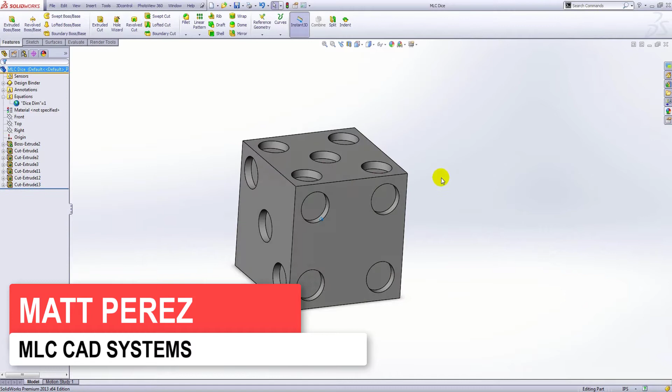Hopefully this episode we're going to take care of some fillets and we're going to bring everything into an assembly and set everything up for motion simulation.

I want to go ahead and hop into using Fillet, and make sure we select the FilletXpert tab. If you remember, our pips were 0.06 deep, so I'm going to make my fillet radius 0.12 and start selecting.

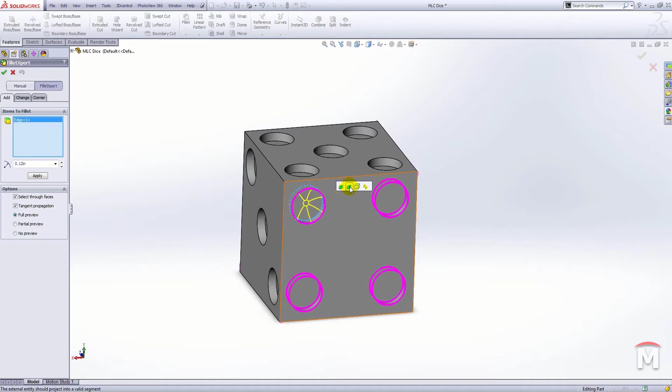We don't want to grab every single edge, but there are several options. The first is grabbing all the internal features on one face. The second is grabbing right features, the internal and external edges on that face for the extrude cut. The next is grabbing all the edges in the model, which is not what we want since we don't want to round the external edges for the pips. The last option is grabbing all concave edges.

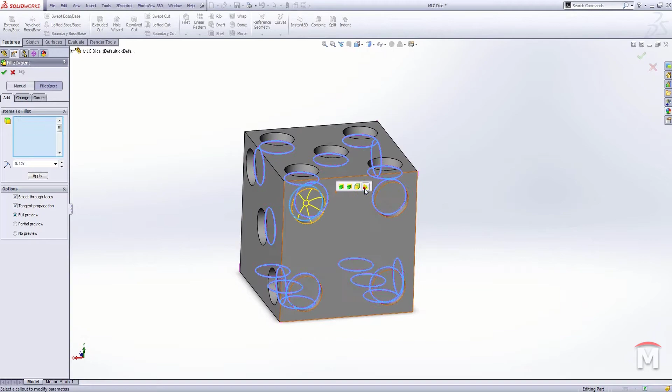This is really nice. This didn't happen to me before in 2011 or 2012 as far as I can remember. So I'm going to grab that, and it's going to apply a fillet to all those internal edges, which is absolutely perfect for me. I go ahead and hit apply, and that took very little time.

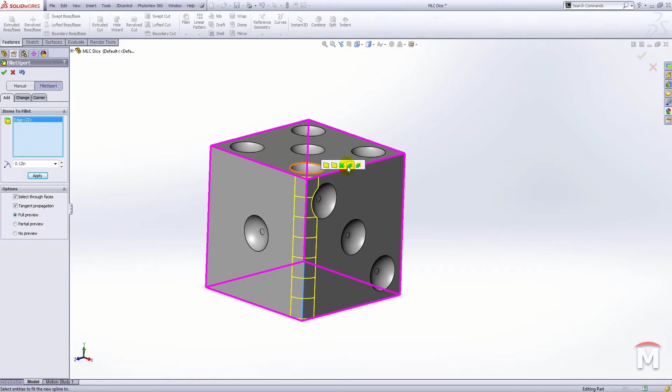Now I want to grab this edge, and I'm going to grab all the external edges. It says internal to feature 11 edges, and the feature in this case is that original boss extrude. I'm going to grab all those, but I don't want this to be the same 0.12 — I'm going to make that 0.05 and hit apply.

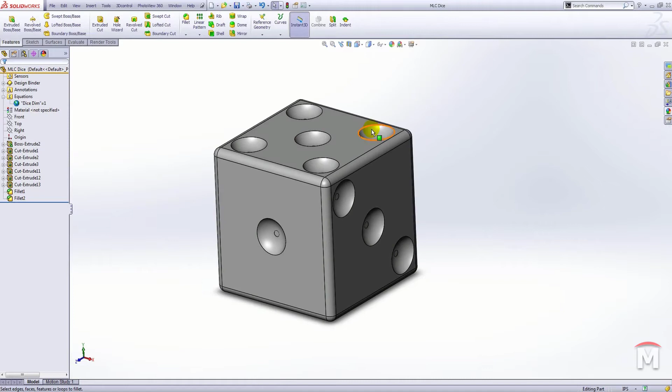Alright, I think at this point that gives us everything we need to do. So I'm going to go ahead and hit OK, save this, and before we get into the assembly and the motion, let's go ahead and apply some materials to this and do a quick render.

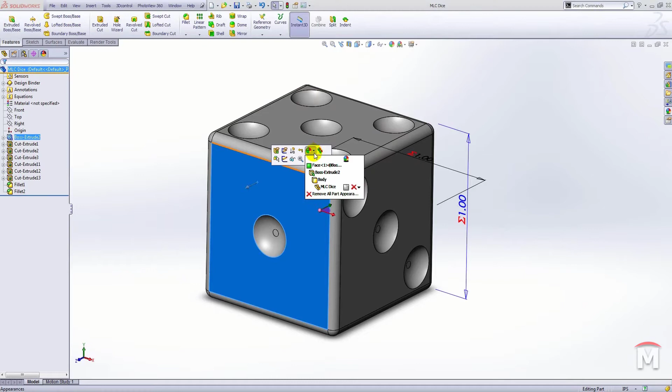2013 has seen some updates for PhotoView, and it's also seen some nice updates in that you can use some Luxology materials, which is really great. So I'm going to left click on one of these faces, use the drop down, and apply an appearance to the entire part.

In my appearances, I've downloaded some Luxology materials. Let me use the drop down box, wait for them to load — I think I've got some furry materials in here. Let's take a look at what I've downloaded: windy grass, meadow, green metallic paint. Looks like we've got a lot of grass materials. We don't have any furry materials, but that's okay.

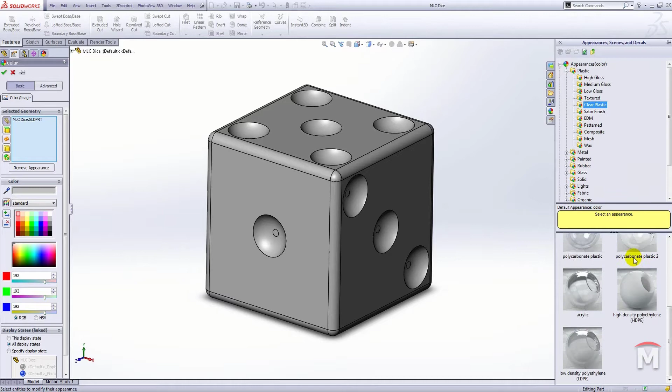We can take a look at some of the plastic materials. We're going to go into clear plastic, and SOLIDWORKS has also updated a lot of these for 2013. For me, I'm going to grab an acrylic, and go to my advanced tab to take a look at the transparency amount listed under illumination.

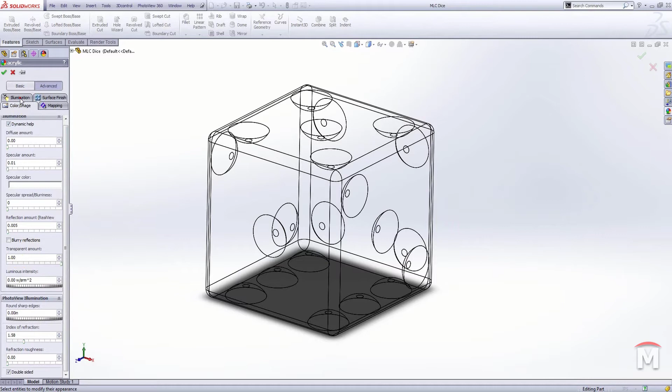Transparency amount is 100%. If I go back to color, I'm going to make this a dark red, back to illumination, and give this some transparency. Now we don't want to do 100% again, but let's do somewhere around 50%, so I'm going to do 0.5, and go ahead and hit OK.

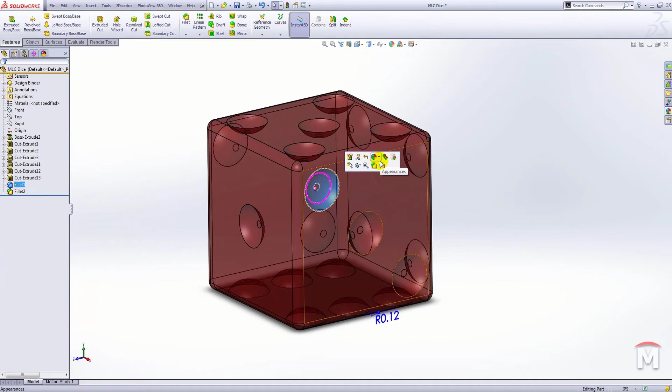Now for the pips, we want to make them white. I'm going to grab the inside of that and apply material to that face. Under plastic, I'll go to a satin finish white plastic and hit OK. Now here's where part of the great updates in SOLIDWORKS 2013 come from — we can right click on that white satin finish and say copy appearance.

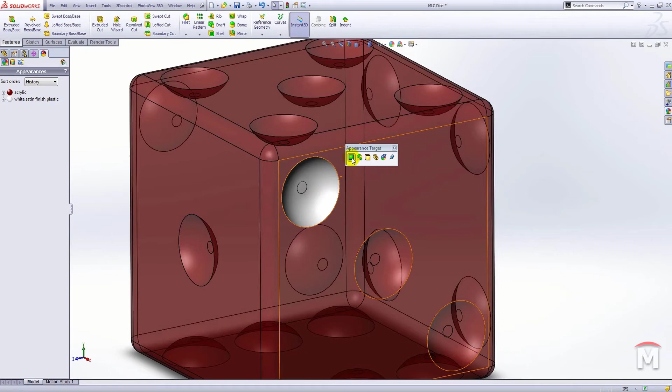Now I'm going to come into the center of this pip, and we've got some more options here. We've got copy appearance and paste appearance. I'm going to paste that, but before I do, I'm going to pin this open and make sure we're pasting it to the face, so our appearance target stays pinned open. That's another great feature here. We can simply click on this face and say paste appearance, and it happens relatively quickly.

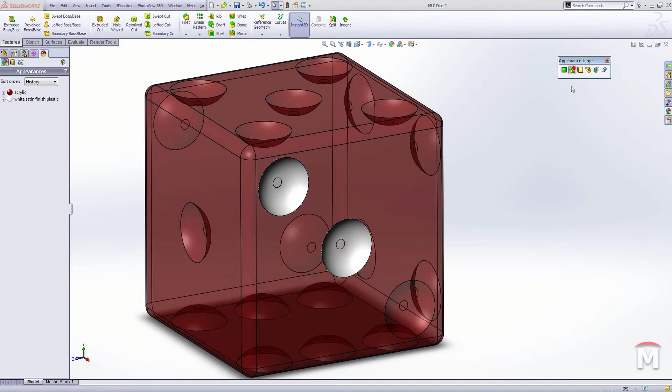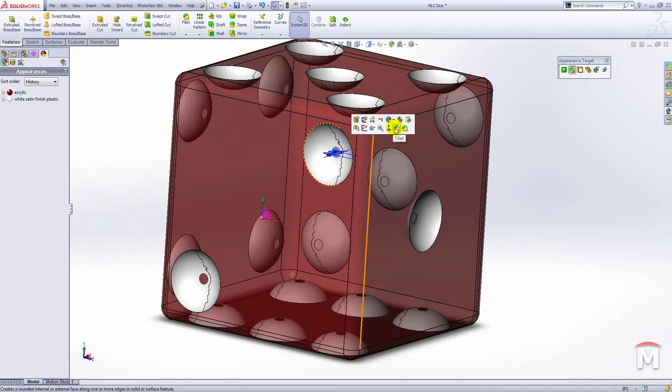We can also do this based on the feature. In our case, the feature is going to be a fillet, so let's go to the 5 side and copy the appearance. You can see that fillet was our FilletXpert, and it applied it to all of those faces. If we do this feature, that feature was only the extrude cut on this face, so we need to go back and do it to all the faces. Of course, it'll apply to the faces on a single side as a single feature. But you can see this really speeds up applying materials to models like this, where you have tons of different faces and features that you don't necessarily want the same material on.

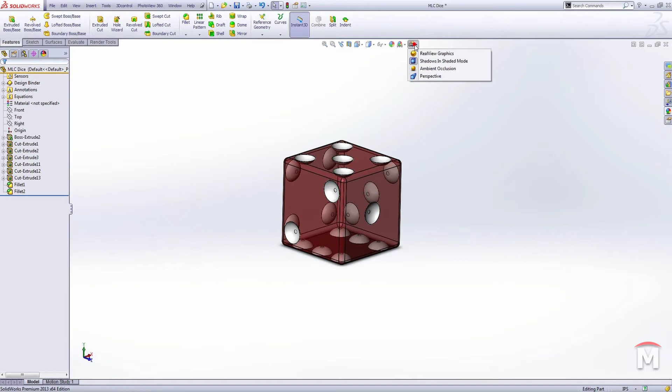Now we can close out that appearance target and take a look at this in an environment. I'm going to turn perspective on, and go ahead and grab one of the rooms. Let's do gray with overhead fill light, and I'm going to turn on my preview window.

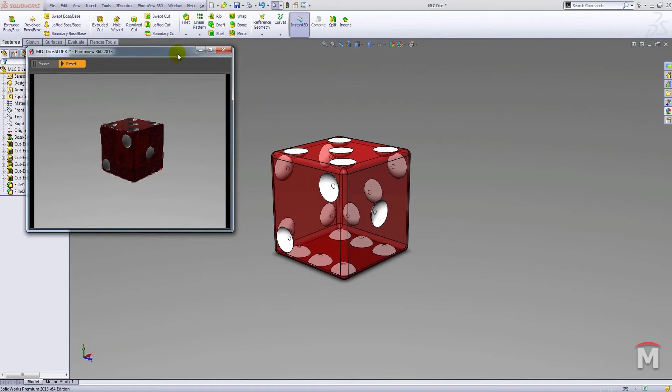One of the great things about SOLIDWORKS scenes and SOLIDWORKS materials is they're pretty realistic. You obviously have to change some settings, but everything ends up being pretty realistic. So I'm going to look at this from the front and make sure I'm actually looking at it on the flooring, and turn my preview window back on.

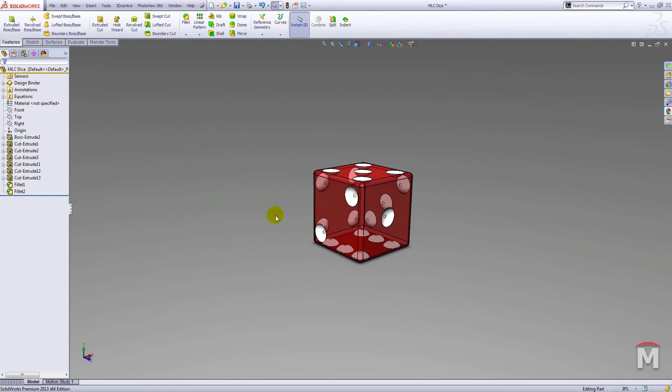Closing the preview window, using an integrated preview on a single pane or something like that - these will speed or slow down your system considerably depending on what system you have. You can see that every time I try to use the 3D mouse and rotate this around, SOLIDWORKS does not like the preview window to update, especially with these materials.

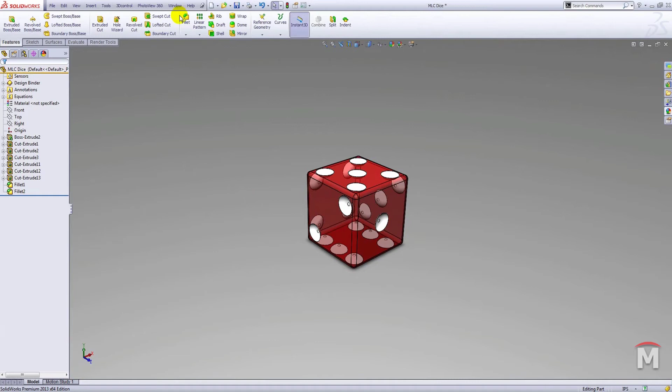So one thing I'm going to do is hop into options, and turn my render quality down to better, turn my bloom on, turn my direct caustics on. One thing you notice at the bottom here is now we have a network rendering option. I'm only working on a single computer, so I don't have a network rendering setup I can use. But if you guys are working on a big network of computers and rendering at night, you can pull some resources from other areas and actually have very quick renders complete for you overnight.

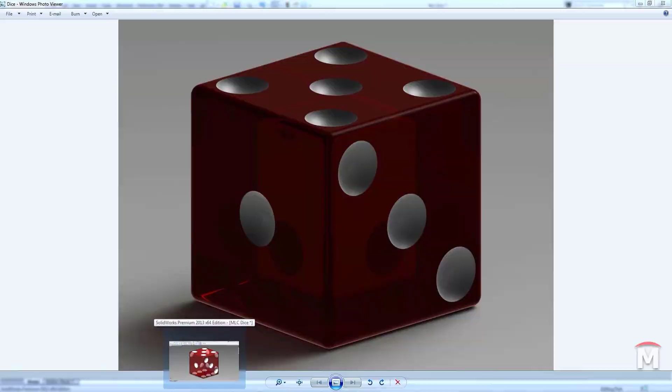So let's take a look at this render real quick. Alright guys, so there is a quick render. You can see we've got the satin material for each of the pips, and we can see through - it's got the transparency, and the detail's pretty good, and we really didn't do any setup work. But that's not the main purpose of this; I just want to show you how quick you could set up the materials, set up the render, and now we can go ahead and move on to doing some motion simulation.

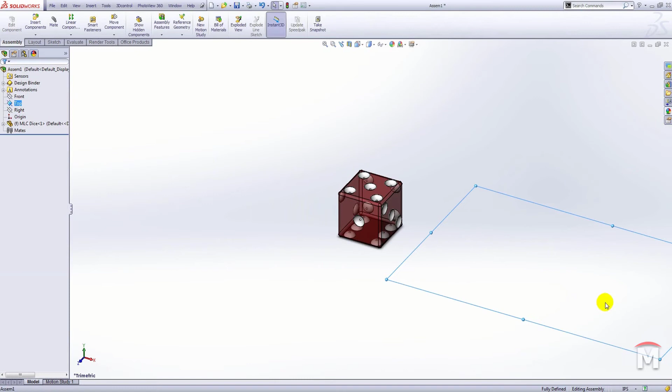Alright, so the first thing we want to do is save this, and now we want to do a new assembly. You can see from the drop down window we've got make assembly from part, so I'm going to go ahead and do that and make an assembly in inch, and I'm simply going to bring that die in. This gets centered automatically on our top plane where I clicked, but you can see it's got the little lowercase f next to it - that means it's fixed in place. We don't want this fixed in place, so I'm going to right click on it and say float.

I'm also going to left click on this, do Control C to copy, just click in my window and Control V and paste that. You can see it pasted it wherever my mouse cursor was.

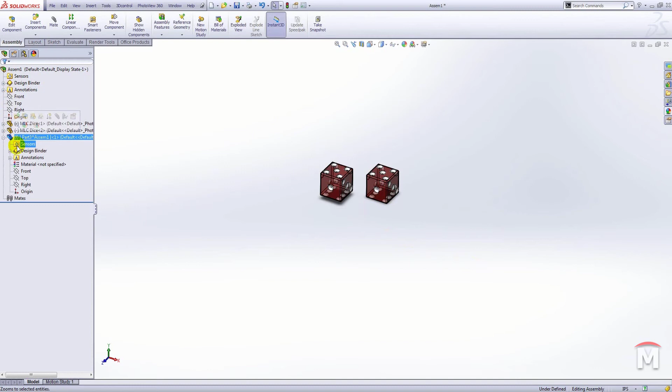The last thing we need to do is draw a floor or table for these to drop onto. I'll go up to Insert Component, create a new part, and hit Escape, which puts my new part at the standard origin for the assembly. Now I can edit this part, which is fixed, and on the top plane I'll draw a table surface.

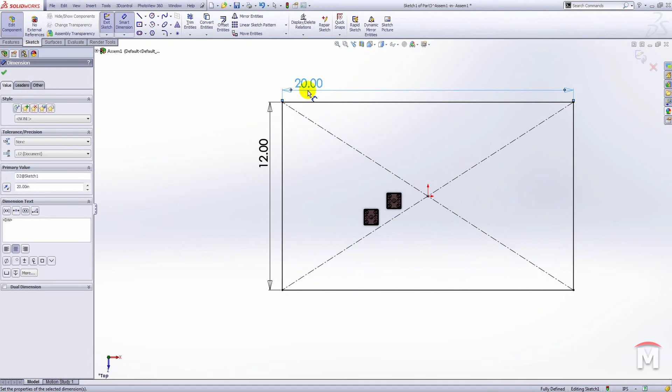We'll center that at the origin and draw a table, roughly 20 by 20, let's say 12 by 20, and extrude it. For right now I'm making this a fairly thin extrusion, just 0.1 thick, the standard number that comes in. I'll show you later why you probably don't want to do that, but we'll see how it works out.

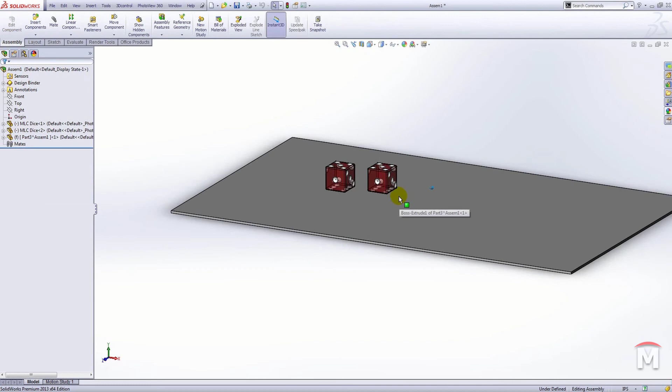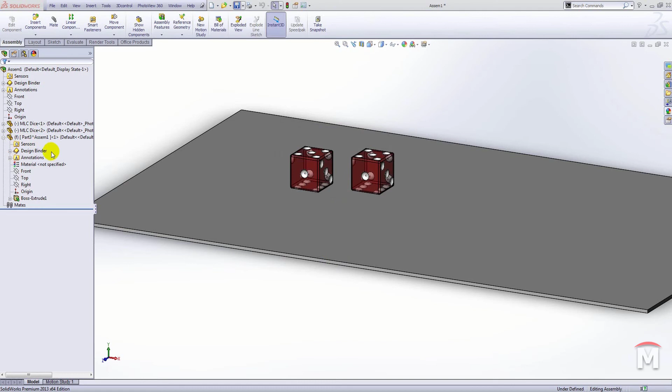Right now let's save the model, save everything, and name it Roll of the Dice. It's asking if I want to save my virtual components internally or externally. This table, part 3 at assembly 1, is internal to the assembly, so I'll save it internally since I don't need to use it anywhere else.

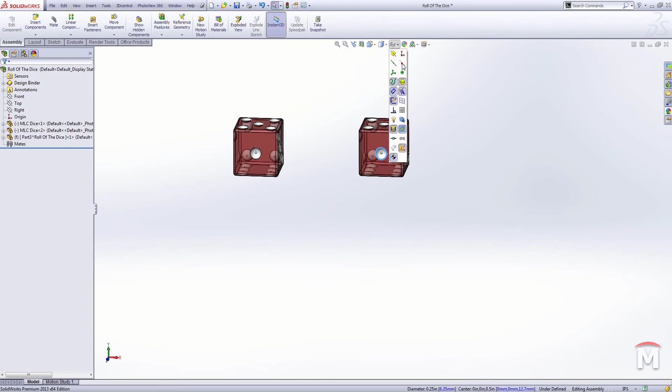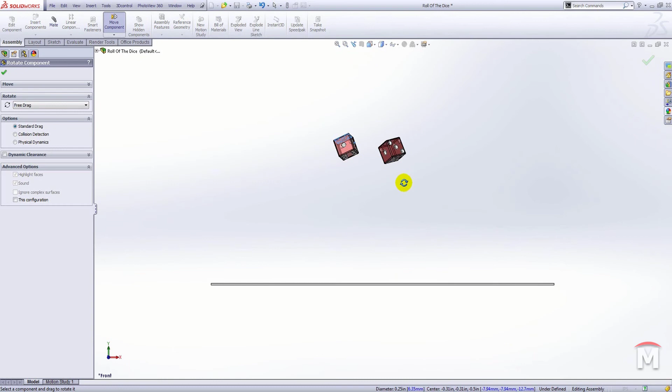Let's take a look at this and move these guys around, get them up into another position, and rotate them. Because of the pips we created as extrudes, I'll turn on the temporary axis, but it's not actually showing up, so we'll just use Move Component, Rotate Component instead. We'll rotate this one and then this one a bit. What I'm trying to do is make sure they don't drop and land on a flat face — I want them to hit a point or corner so they bounce erratically.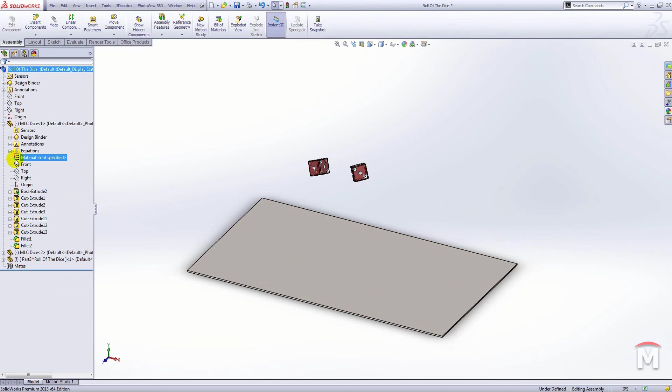Now we'll save this, rebuild the document, and we could go into a motion study, but first I want to apply some materials and pick up the motion study in the next video. For the table material I'll right click and make it plain carbon steel. For the dice, I'll right click and make them ABS PC, a sort of plastic material, which overrides the acrylic material we had applied.

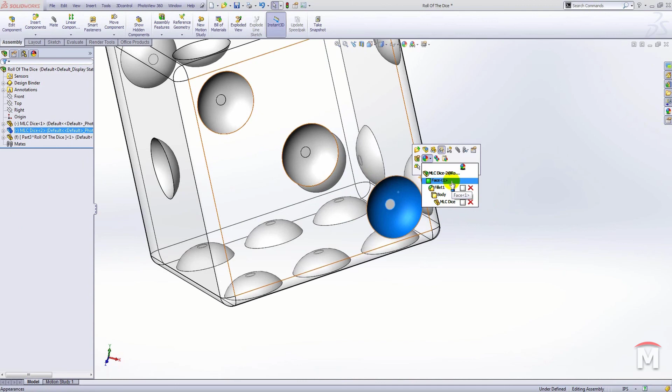The material we applied before wasn't actually a material, more an appearance. So right now they're all clear except the pips, which are white because that was applied to a face. If you look in the hierarchy, the actual dice is polycarb plastic, and the face has the satin white applied. If we want to change the color back, we can apply it farther down the hierarchy, to the body instead.

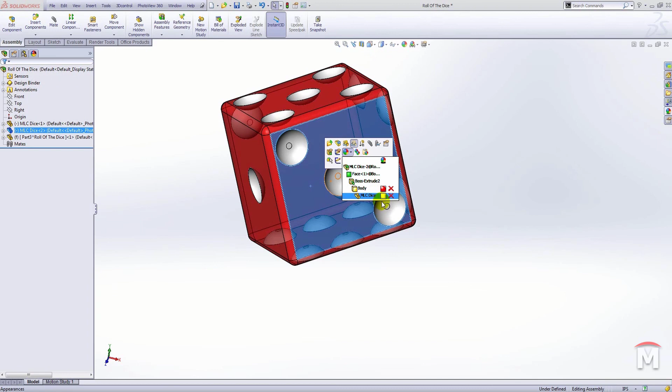So we'll again make this transparent and hit OK. Now if we look at the hierarchy, we've got red applied to the body, which sits above the polycarb plastic applied to the part itself. Let's save this and we'll pick up the motion study in the next video.